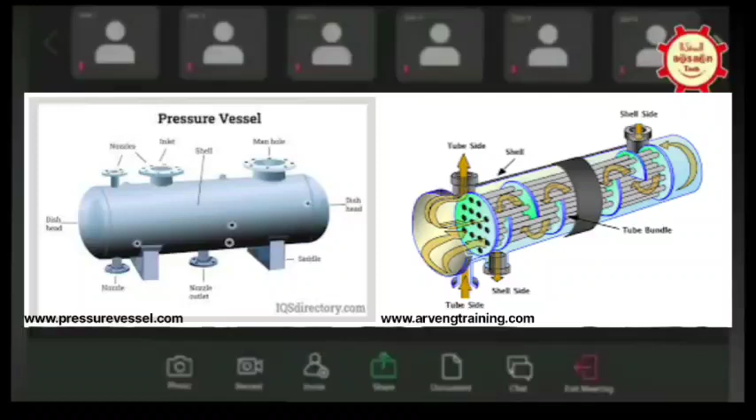Basically, I'm in this field for the last 24 years. From my first job, I started doing designing of pressure vessels and heat exchangers, and now after 24 years, I have experience of designing pressure vessels, heat exchangers, reactors. I started my calculations on the basis of Excel sheets and manual calculation. Now I'm comfortably able to do the job with PV Elite also. So totally you have around 24 years experience, right? Yes.

So you are still working with some company or you started your own? No, right now I just started my own. Okay. Yes, I'm right now working as a consultant. Baroda. Okay, Gujarat. Yes. I think here it's better if you tell your company name so that it gets advertised here also. Yeah. Now I have started just 15 days back.

And I've started my consultancy with one company for ASME U certification. I am guiding them how to achieve the ASME U certificate for their workshop and their facility. I'm training their design engineers as well as quality engineers for the mandatory appendix requirements. So it's my first month rather. And I also started working with one company providing them the designing of equipment.

So you have given your company some name or is it still pending? Right now, sir, I have started with only my name. Okay. Still the name is not finalized yet. No. Okay. Best wishes for your newly started company. Thank you, sir. Thank you.

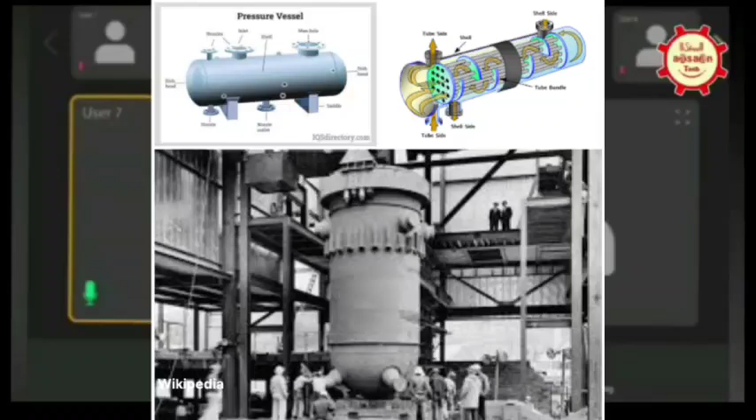Do you have any specific issues that you want to discuss here? Any solutions you want to highlight? No, right now I just wanted to attend this kind of conversation, and would like to know the basic problems with pressure vessel designing, reactor designing or heat exchanger designing. And during discussion, if my help is required, then I could extend it. That's why I have joined this group, sir. Okay. You have 24 years and ASME type jobs, so you have a better hand on the designing of equipment. Best wishes for your new company.

Thank you. Okay. Abhishek Nag, I think last time you missed, right? Yeah, hello, good evening everyone. Good evening. Welcome. So you know Neeraj? No, I don't know Neeraj. I think Abhishek Nag also has around 20 years, right? I have 16 years of experience. 16 years, okay. Myself around 24. And Ramakrishna, you have around 20 years. And Atul Sharma is around 5 years.

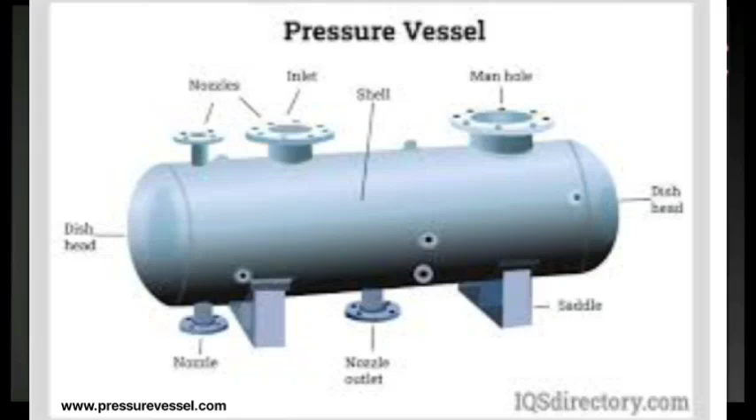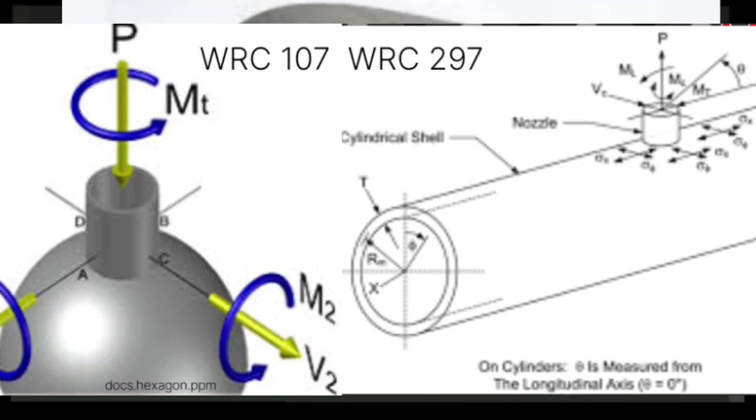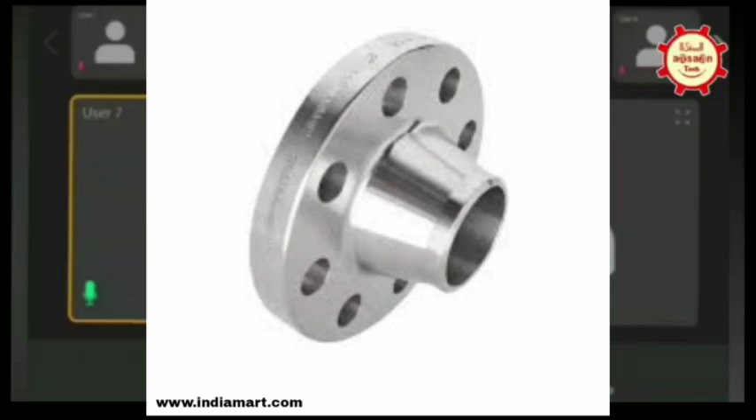Should I start with one of my queries? Okay, we can start. At present, sir, we are studying one concern we are seeing in this pressure vessel, regarding external loading on the nozzle and flanges. My issue is that by default we check external loadings on the nozzle, as per WRC 297. But my question is, why don't we check by default for the flanges also? Because the external load will come on the flanges. If the load is quite high, it will bend the flange face, and with the gas pressure there could be leakage. So why are we not checking it mandatorily for flanges?

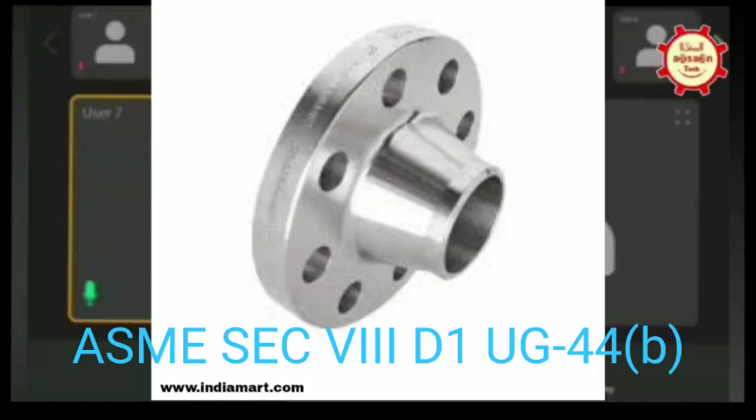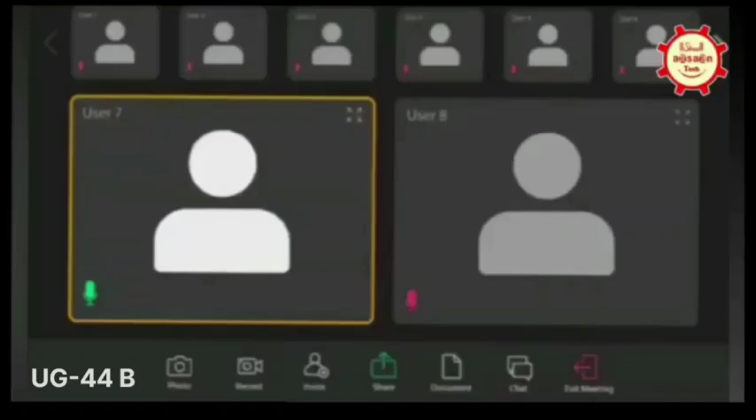In the previous section it is UG-44(b). If you check that box, it generally performs that analysis. The question then is why we don't perform it for the flanges? Anybody want to answer his query? You mean weld neck flanges we are always considering, right? That's already given in the code also, but I think you are referring to SORF flanges, right? No, my question is specifically for weld neck flanges, WNRF flanges. UG-44(b) says external loading may be checked for weld neck flanges. Why not shall be checked?

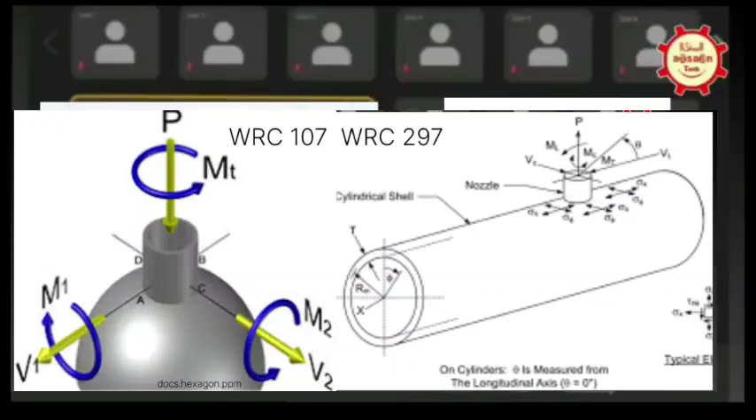Maybe next year they'll make it a mandatory requirement. Actually, Abhishek Nag, you want this flange to be checked compulsorily, right? Yeah, the basic thing, in layman language: if the external piping load is coming on the nozzle, we are checking for that. Why don't we check for the flange? Shall I answer your query, Abhishek? Yeah, please go ahead. So by default, everybody is checking.

I mean, in all our projects we are doing that, and most of the engineers are doing it. So there is no question about that. So it is a good practice. So I think your concern is about the code wording that they mentioned, maybe, right? Yeah, correct. So why didn't they put it as "shall be", right? Yes.

So normally, as far as my point of view is, ASME, whenever it puts some new clause or some new design method, I think they will give some time before making it mandatory. That's why they put it like this, and then maybe after some people give feedback, they will make it mandatory. I think that's the reason. That's what I feel. So if your query is answered, then I have a question to Neeraj.

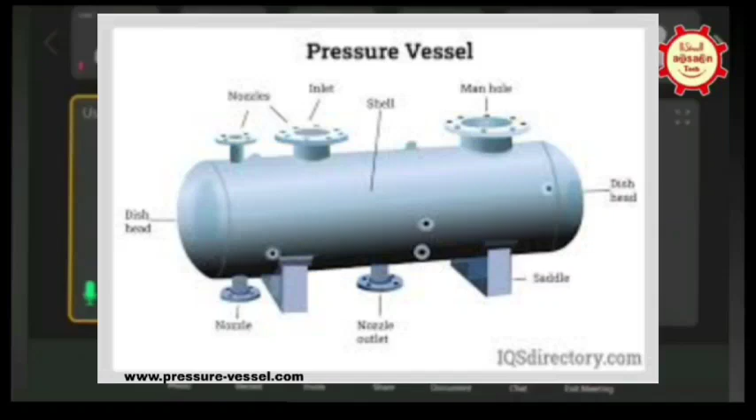I want to add something in this one. Like Abhishek told, now almost all these flanges started compulsory verification for U stamp. For normal vessels which are not U stamped, they are saying maybe if you have not done it, it's okay. But for U stamp, meaning ASME certified vessels, they want this flange compulsorily verified as per the recent code update.

No, actually, reputed EPCs, I mean PMCs, like U stamp. So for all our projects, none of the equipment is U stamped, but we are mandatorily checking it. So as far as my point of view, in all oil and gas projects generally, in most of the cases, it will be checked. Yeah, all EPCs have also made it compulsory to be verified. Correct.

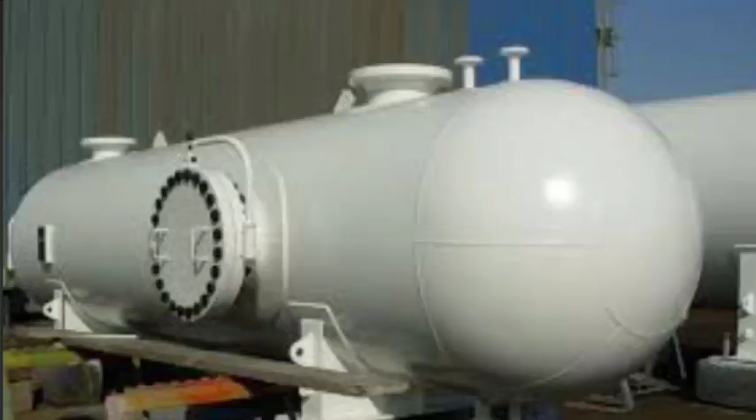Sir, what is happening is I am arguing with the client that you are saying external loads are to be checked for the flanges. But my argument is it is not a U stamp vessel. Nowhere in the specification is it mentioned that we have to follow UG-44. So why should we perform UG-44? Because when we perform UG-44, our flange rating goes from 150 up to 300.

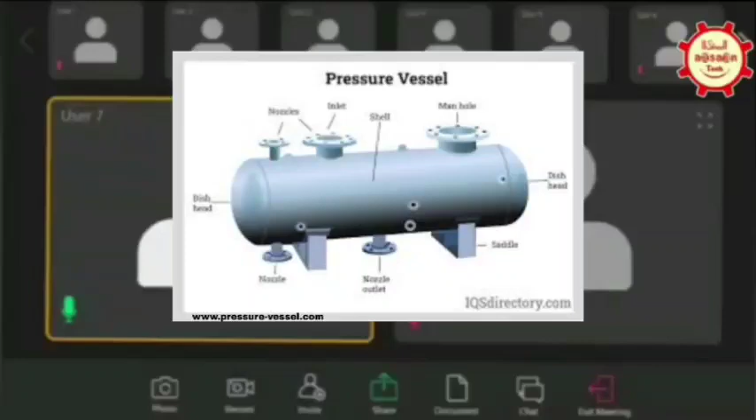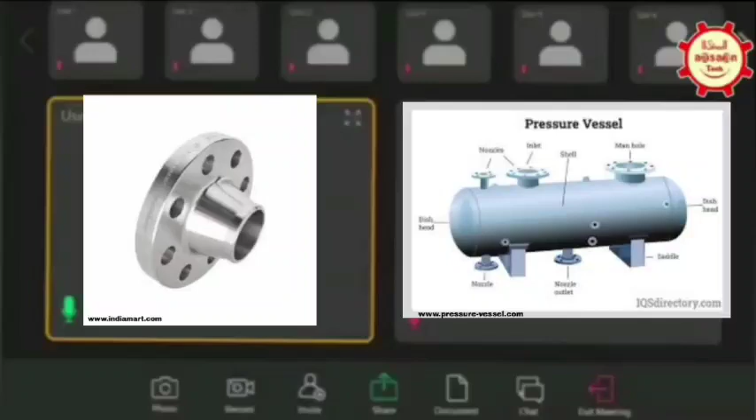It adds cost. Yeah, the flange rating increases, but in the long-term running of your vessel it will be safer. If you verify with that and provide higher rating flanges, your vessel will be safer from failing in between working. So that's why they want these loads to be verified.

Yeah. So I have a question to Neeraj, in continuation. I think Abhishek is clear now. You were mentioning that in how the nozzle loads will be analyzed there is a difference between WNRF type and slip-on. Is that what you were saying? Can you just throw some light on that?

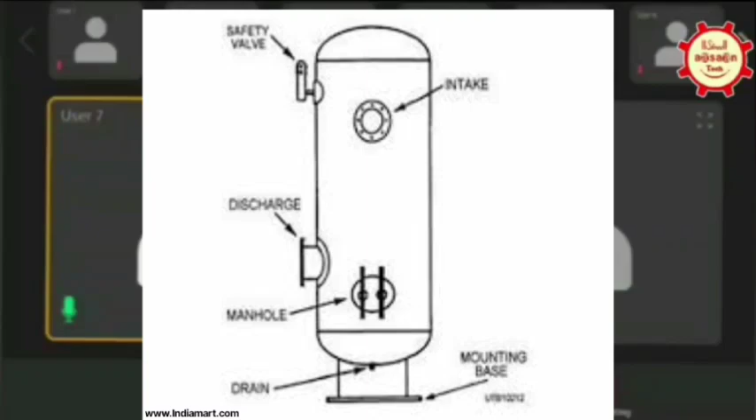Yes. In my earlier career, I designed a lot of pharmaceutical equipment also. I would like to go back to Abhishek's question, and I'll connect with this one. In one of our ASME audits, our company made an air receiver. It was the first job, a demo vessel, and in the air receiver they had not provided any external nozzle loading. The team leader who came for the final audit told us, if this external loading is not specified and you don't go for this derating, then it's not mandatory.

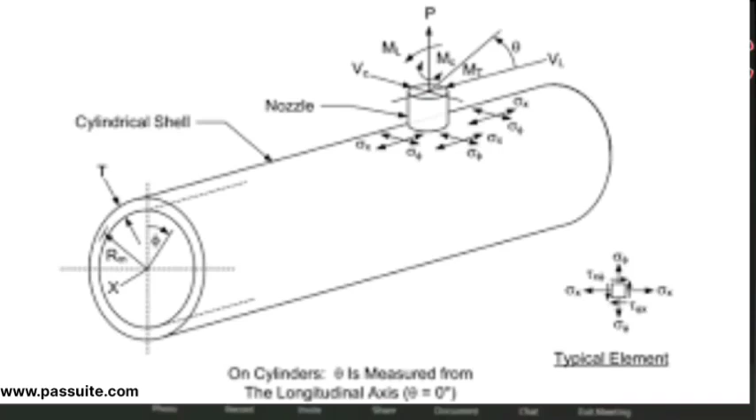But in future, if you have a job, how will you be able to justify your design at that point of time? That is what he would like to check. So it is not mandatory, but you have to specify it so that your design engineer is capable of handling those external loads on the nozzle. So they asked us to specify the nozzle load as per API 661 and add those loads on the nozzle, and we got it done with our design engineer, even though it's not specified in the code.

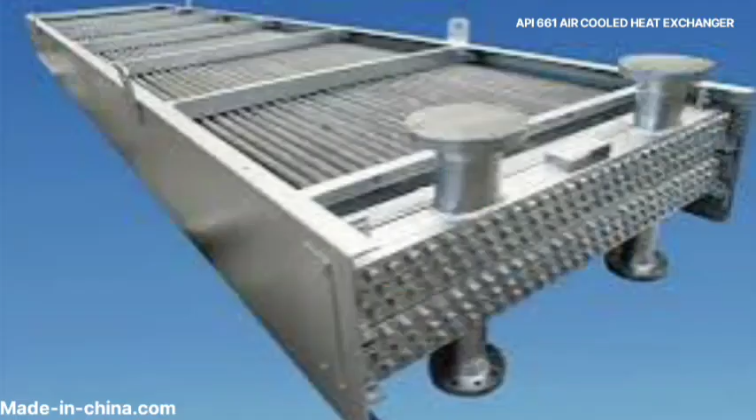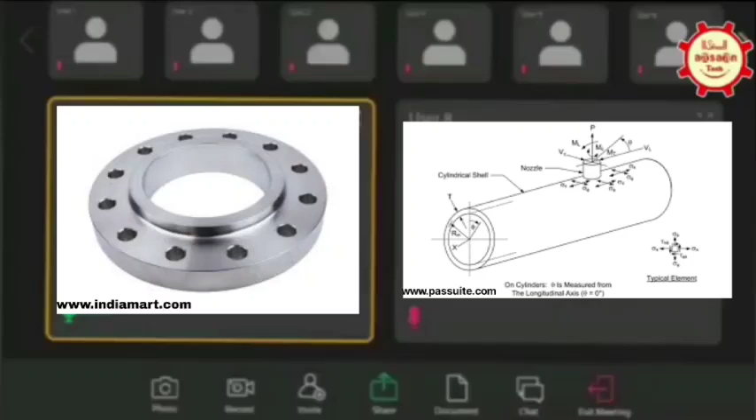So API 661 means it is a plate heat exchanger, right? No, API 661 is air cooled heat exchanger. Sorry, yes, 662 is plate heat exchanger. Okay. And for these SORF flanges, all nozzle loadings are always there. Wherever instrument nozzles are there, no nozzle loading should be considered. But wherever it is connected to a pump or any process nozzle, nozzle loading will always be there.

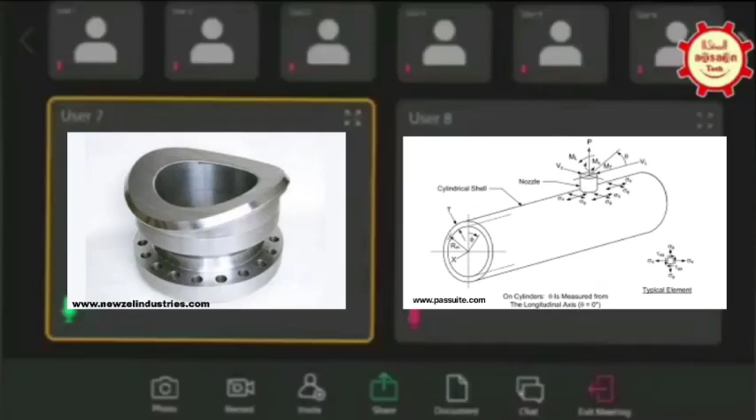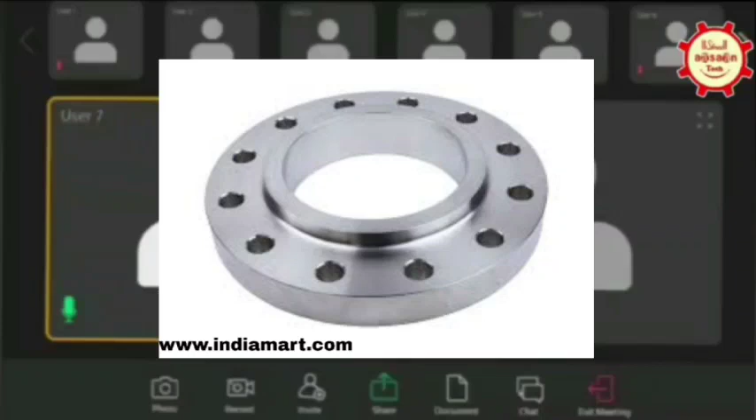So if pressure is less and SORF flanges will be connected, then code is allowing that you need not consider the derating of the flanges. So that's why, where it is specifically mentioned, there is a distinction between WNRF and SORF. It is very clearly written in UG-44(b) that only WNRF flanges, and not SORF flanges or any other kind of flanges, are applicable for derating. Yes. Okay. So code is written for WNRF.

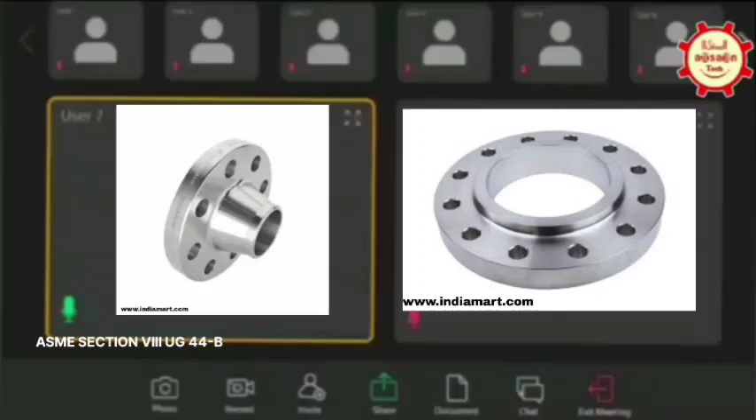Right. So my question is, what about the SORF flanges? Although code is saying it is not required, what is your general opinion? There also it must cause some kind of leakage, no? Correct. But what I understand from my experience is, if you see, the weld neck flange welded with the nozzle pipe has a butt weld joint, right? But when you are welding it with SORF, slip-on flanges, it's not a butt weld. It's a kind of type 7 joint, both side fillets.

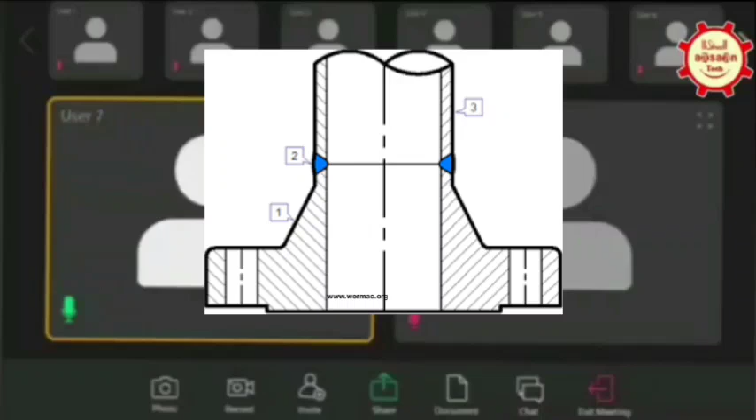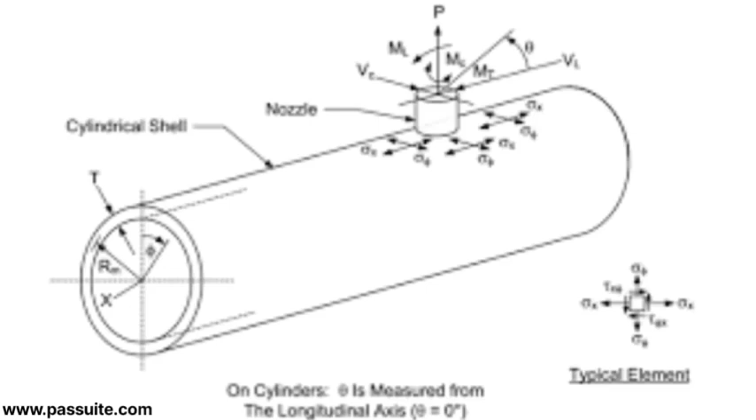Right, correct. So it's my assumption that it doesn't have any worry about bending from one point, because it has been welded from two sides. So that's why nozzle loading is not quite conservative to be considered in that case. That is only my thinking. I have never cross-checked with anyone. But butt weld, there is no support. If the weld fails, then bending loading and all other loadings will take place immediately and start leaking out.

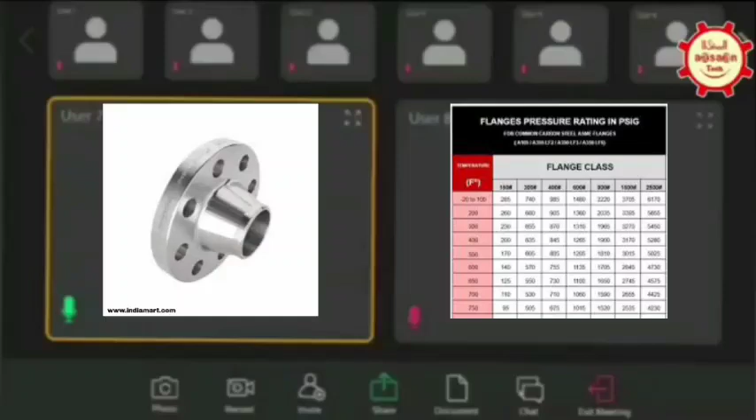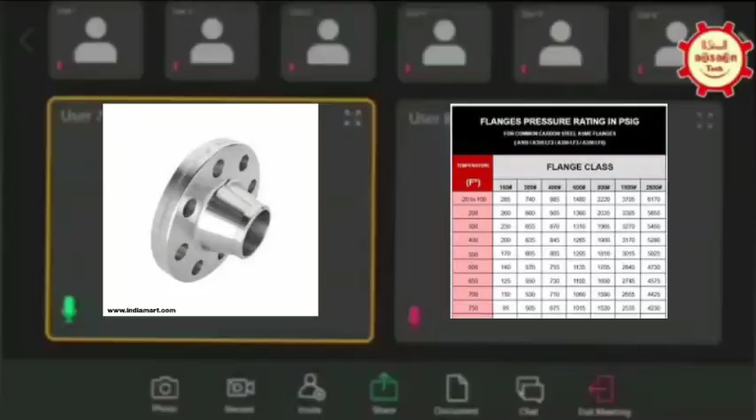No, but if you think about it in terms of strength, a WNRF flange is much stronger compared to slip-on. Correct. For pressure rating. You're saying there are two welds, so the slip-on flange will take more load and all kind of thing. I think that I disagree. But maybe, I don't know. It could be that the connection is flexible, I also don't know. Correct. It is nowhere written. I have raised so many posts for this on LinkedIn and other places, but I could not get any satisfactory answer.

And thing is, strength is okay, but when bending load comes, your lap kind of joint will withstand more than the butt weld. That is what I can feel. And this one is a kind of lap weld joint at that particular point. So maybe the bending stresses or bending moment can be much more easily absorbed. Yes. That is the only reason. But I have to check with some experts. I have tried so many times, but couldn't get through.

Yeah. So to add to that, another thing is generally slip-on flanges will be used only in non-critical service. Maybe the loads are not too high, so maybe that is also the reason. Correct. Okay. Thank you. Normally slip-on is used where it's not that major service. And weld neck is for severe service, or maybe U stamp vessels, or high pressure. So basically weld neck flanges have to be used in that.

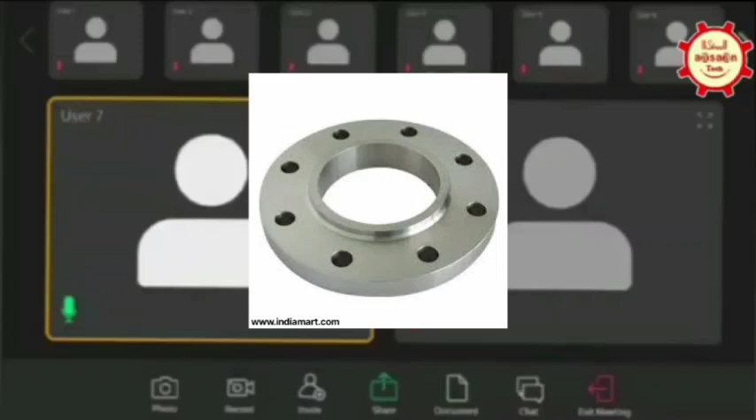But Abhishek's question is on flanges, the loads on the flanges. Correct. So you are saying that slip-on flanges will take more loads than the weld neck? It's not load, I am talking about the bending. Okay, so slip-on takes more bending than weld neck. Yes. Okay. You also try to cross-check this question. Why? Because normally in high pressure, high loads, we go for weld neck. And for normal service, there is not much load, not much pressure, then we'll go for slip-on.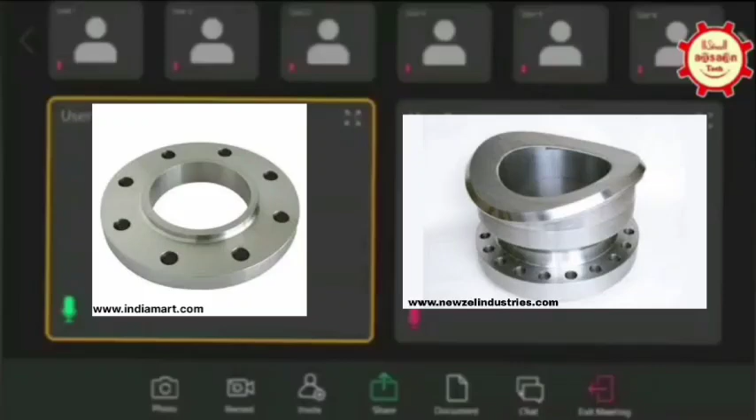Because assume that nozzle is connected with the pump and the pump has some vibration, then definitely the bending load will immediately transfer to that particular welding joint. So maybe that bending load will be critical for taking care of that joint. Okay, Atul or Anshul, do you have any opinion on this one?

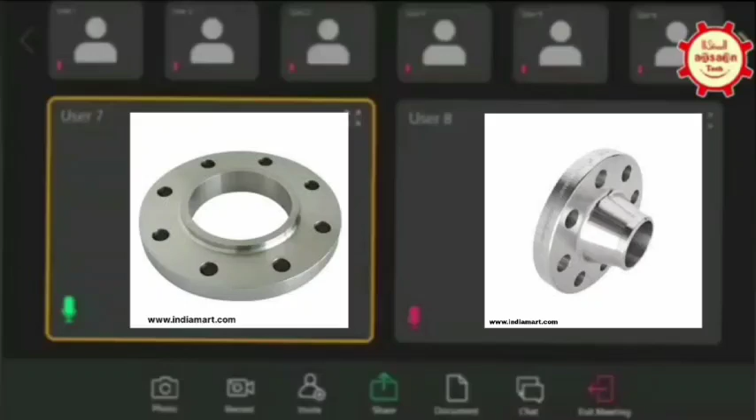Yes, actually, slip-on flanges have more moment of inertia than weld neck. Moment of inertia means it takes more load. Their mass is distributed more away from the center as compared to the weld neck. Okay, so it will take more moment. Moment of inertia is directly connected with the center, means the CG. If you see, the CG of a weld neck flange will be very close. Now I got some idea from Anshul. There are two weld joints, so the CG will definitely shift and moment of inertia will be more. I think this is also a good logic, Anshul.

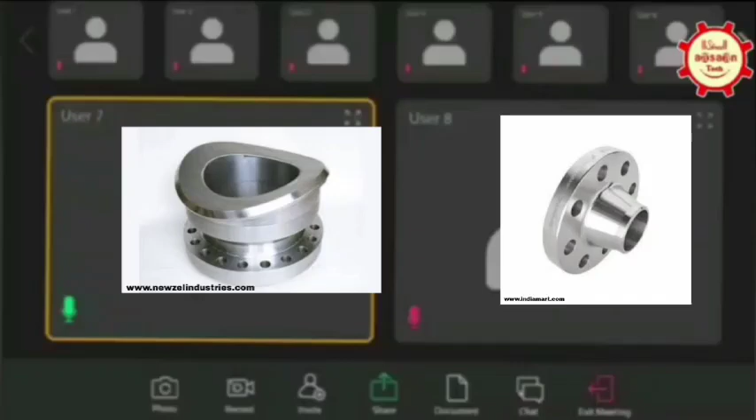Abhishek, for your flange rating question, they have mentioned in the MR that you have to check the nozzle, and if the flange is derating, you have to re-rate the flange. First check the flange as per Appendix 2. If it passes, you don't need to derate the flange. If it does not pass, only then do you use the higher rating flange. They have written it specifically.

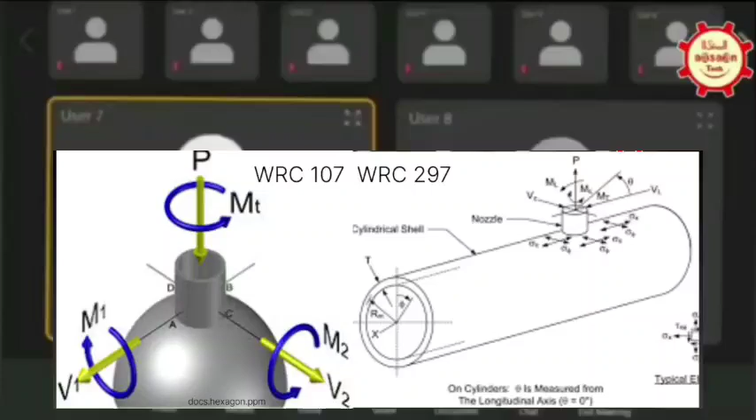This is in the specification, not in the ASME code, so we cannot argue with the client about that. Actually, many people use the Appendix 2 design to prove that nozzle load is not a consideration, because you have designed considering the worst case. Appendix 2 is more severe than the ASME B16.5 application.

16.5 gives the direct rating sizes. The 16.5 is based on past data rather than more theoretical calculation. So it means it's based on requirement, as you said. It may not be the case for Abhishek's client - their client requirement may be different. I was saying that even they are tired of raising the rating, that's why they have mentioned it.

Okay Abhishek, I think you got your answer. If you verify, it will be well and good. If you don't verify, maybe in future you may face some issues. That's why they are asking for the actual load, which is for the piping.

If you do the actual piping loads, you can put those loads in the field and see what the flange rating is, whether it passed that load or not. But here they're saying do iteration - just tell me with this thing how much maximum load the flange can take.

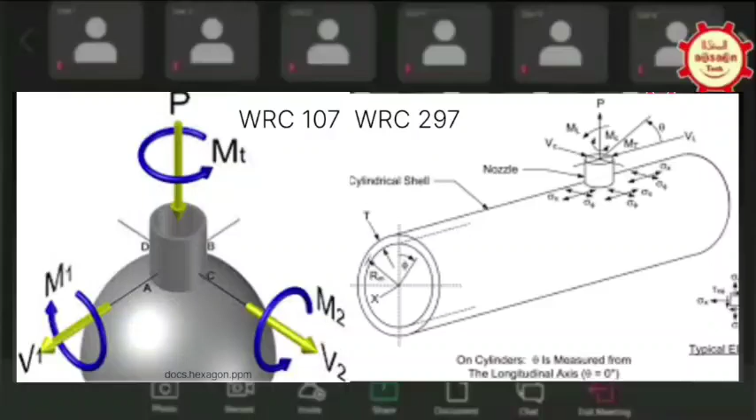They are in fact asking us to give them our load so that they will check with their piping. Whatever you put in the PV Elite at those loads, that's verifying at the edge of the pipe, meaning the nozzle end which is connected to the shell - so at that place it is verifying.

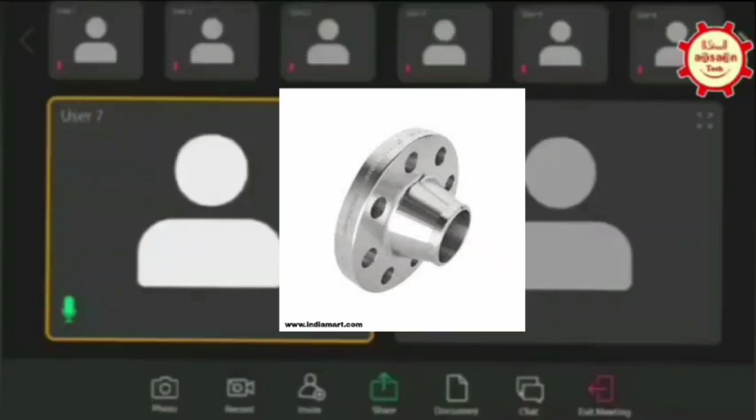But this derating is verifying at the flange face. So your flange is verified in the derating one, and your edge is verified in PV Elite when you put the loads, the WRC one. So these two are different, right?

Yes, but even if you are applying UG-44, it takes the flange into account - not the face, the flange. Either way, the flange is taking that load.

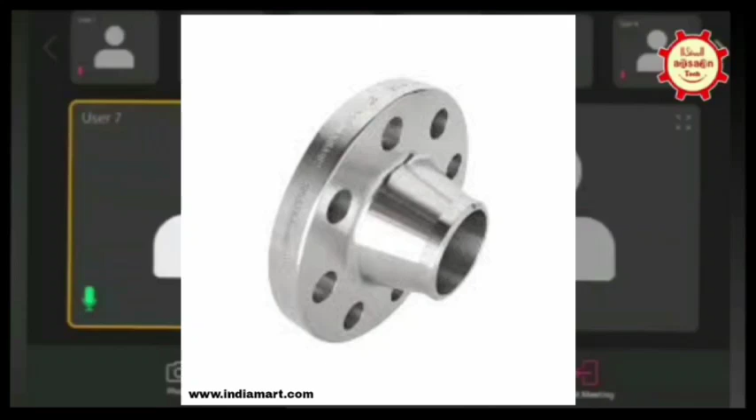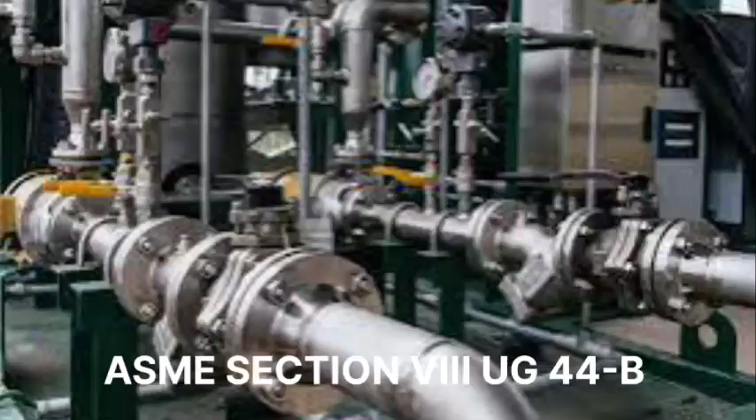You just tell me the figure, how much load a 150 class rating can take - we'll check with our piping. Yes, you have to verify with this one, UG-44, and I'm asking that you give me the piping load in our calculation.

Yes, that is the better option. You can't just rerun the analysis by entering the values - it's iteration then.

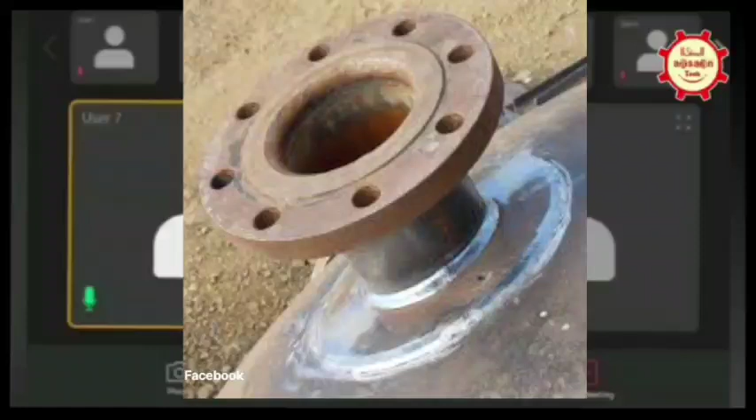But normally these loads come from piping, and our static analysis will not give us that this much it can take. Reverse engineering - whatever supports they provide for their piping, after the end of where our piping is ending, which connects to our nozzle, at that place they will provide the loads.

This is where the loads arrive from piping, and they will give us, and we have to verify our nozzle. But rather than that, if you provide from your side that these are the loads we can take, then they have to change their routing or provide additional support. But generally we have standard loads - some specifications refer to the maximum loads piping can give you, so you can take that, or else you can ask your piping how much loads you are getting and add that.

Okay thank you. Coming to Neeraj - I checked UG-44 but didn't find that statement that it is applicable only for slip-on flanges. No, it's applicable only for weld neck flanges.

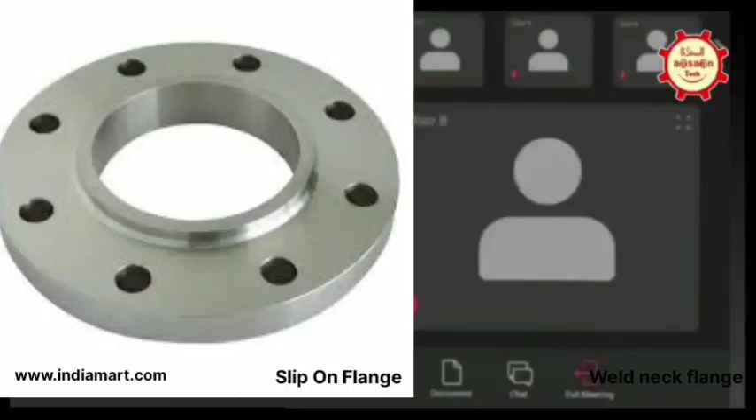Ramakrishna, can you share that? You refer to UG-44B. Yes, they have UG-44B, written evaluation for flange joint with weld neck flanges.

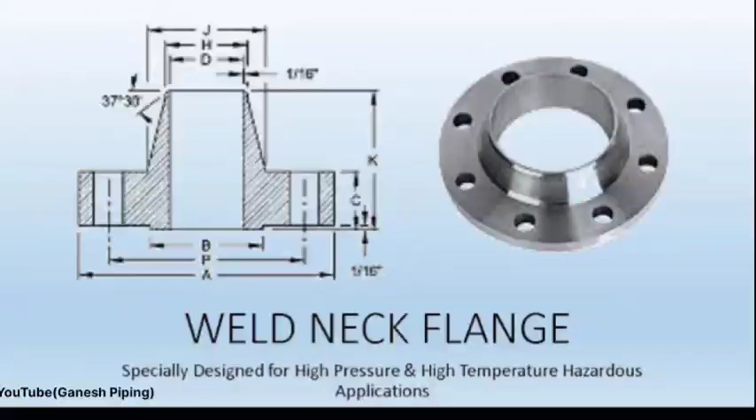Where they mentioned, can you share the screen? Okay, right, you got it. I got it. Yes, I missed it.

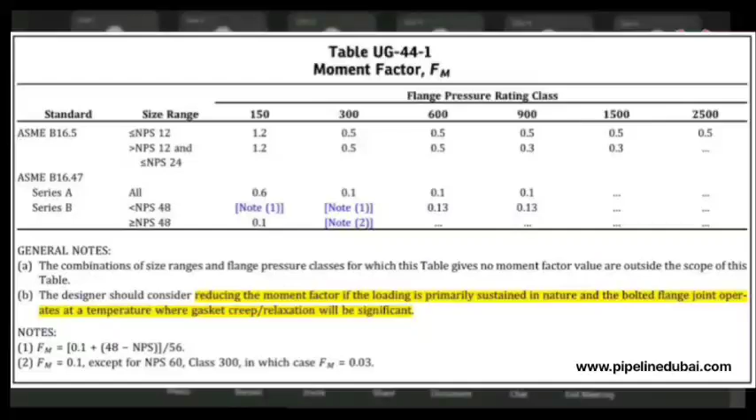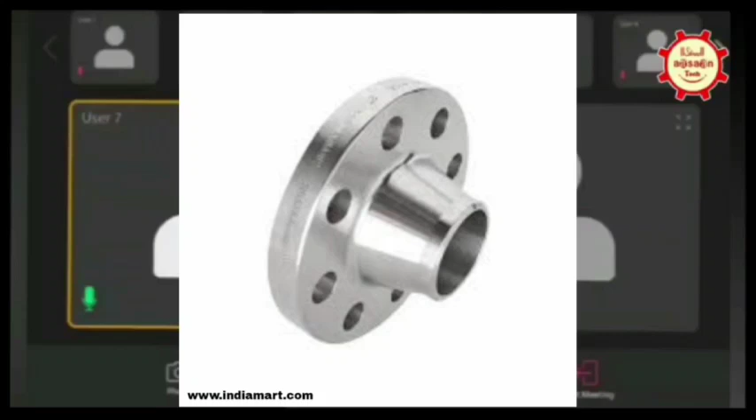Thank you. Now the code has revised this 2901-1 code case, because they have changed the FM value given in table 44. That FM value was a major culprit, so they have revised the entire FM value. Now if you have the 2901-1 code case, it shows that a lot of flanges were failing before, but now all the flanges could very easily pass due to that revision in the table.

Do you have that code case? Actually, I wasn't able to find that. No, it's not available, I checked on the ASME website. But I got code case 2901. Yeah, 2901-1. 2901 was the original code case from 2019.

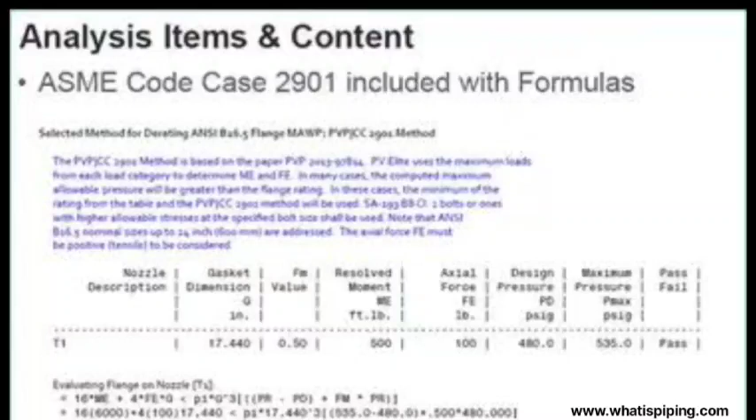They have revised it again in 2024, just one month back, that is 2901-1. I think Atul Sharma, you were supposed to share this, no? I only have 2901, not -1. You don't have it, okay. Yeah, 2901 I have also in the group, but -1 I don't have.

Once I get it, I will upload it in the group, don't worry. Yeah, please, because I got that table in an Excel sheet. I don't know how much we can trust it, but I have that revised table already. If you want, I can upload it. It's not authentic right now because I don't have the code case, but I can upload it.

Anyway, please upload it, it might help Abhishek right now. Okay, Ramakrishna, do you want to share some more? Yeah, one minute, I will share it. So my screen is visible, I guess. Yeah, it's coming through.

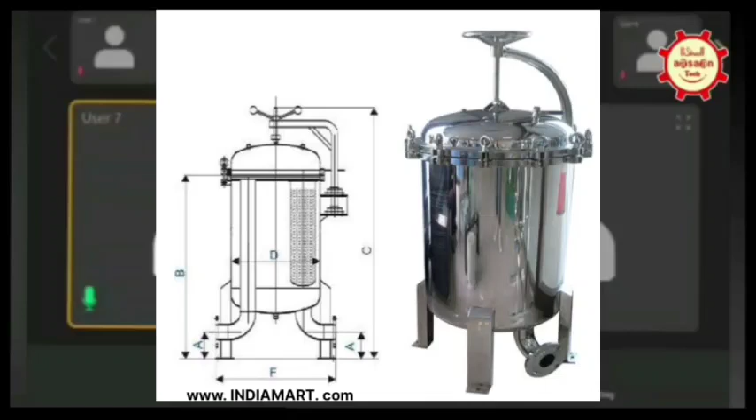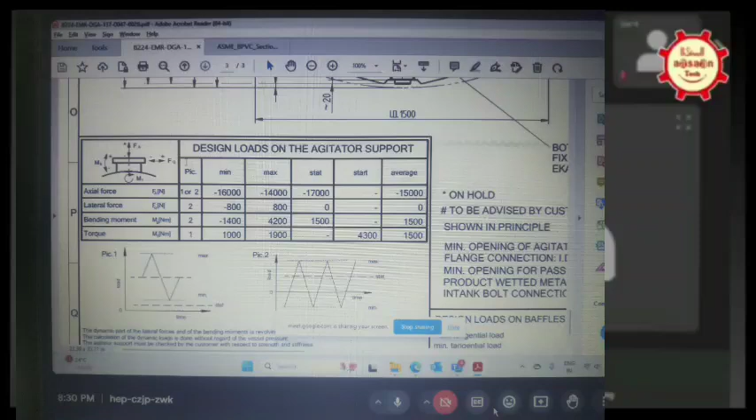Can anybody provide guidance? Can you please repeat your query? So normally for agitator vendors, they will provide the equivalent static load because this needs to be analyzed. This load we need to put on the nozzle, to analyze it or to provide proper support we need to analyze it. Normally vendors give equivalent static load, but actually it is dynamic, right?

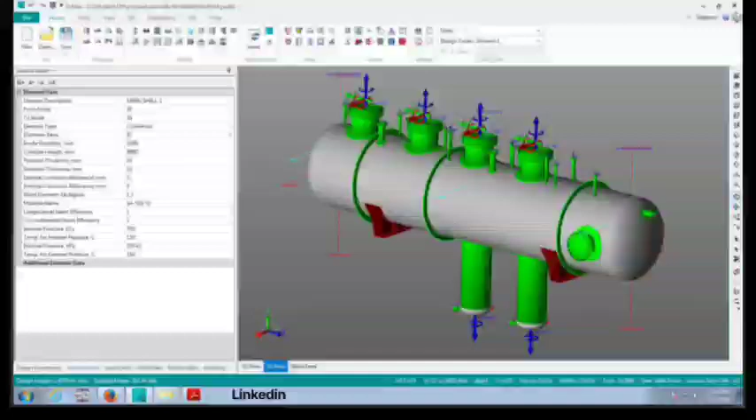It is dynamic because it's continuously rotating, so it will be dynamic loading, but vendors provide equivalent static load using some conversion factor, and that we can put into our PV Elite and analyze. But in this case, the vendor has provided only dynamic load, he didn't give the static load. So can anybody guide how we can convert this to equivalent static load?

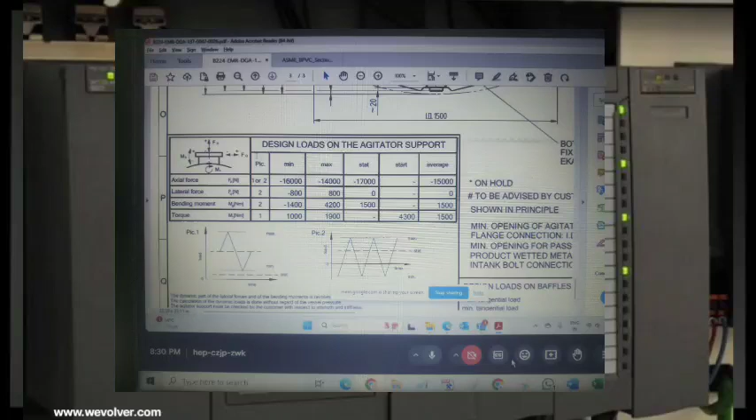But where is it given that it is dynamic? Because you see this, you see PIC1, PIC2, with respect to time he has given that chart, you see below. It is clear, no? Yes, it is clear. But we cannot do the dynamic analysis unless we do the FEA.

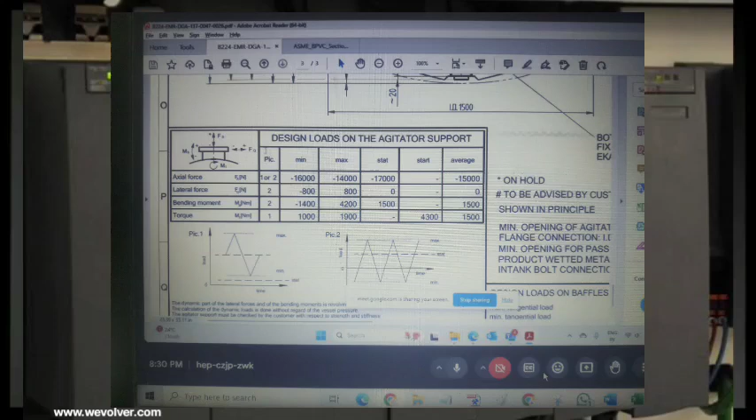So you are thinking that this is the dynamic load? Yeah, right, yes, you see that he has given, if you see PIC 1 and PIC 2, and he has written also, where the loads are given, for example for axial force, he said 1 or 2, meaning he has given how much is minimum and what is maximum. Some 'stat' actually he has written, but I don't know what is stat and what is start.

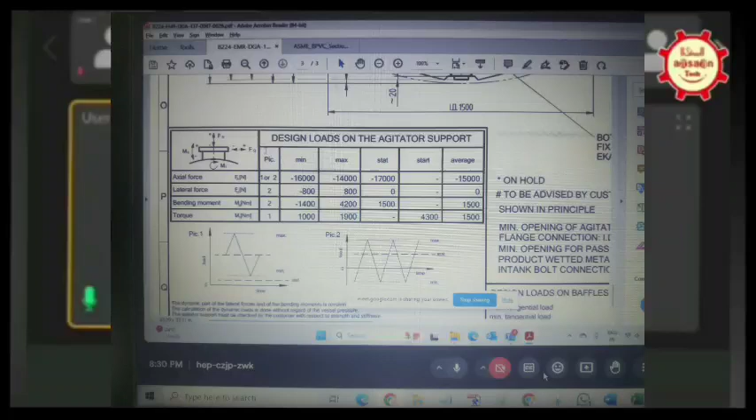I don't know, I think he didn't mention clearly what is stat, whether it's static load, it's not clear, he didn't put it clearly. Anybody want to answer? Static is greater than max. I don't know, but you're saying this is the dynamic loads. Yeah, sure, definitely it is a dynamic load, but even minimum maximum is given, and below that he is giving that curve also.

You see, with respect to time he has given this. Yeah, but this with respect to time given, maybe it's for the motor connected to this vessel. No, you see this design loads on agitator support, this is load only, external load. Yeah, so this is on the support. Support in the sense support is our nozzle basically. Yeah, but then these values directly, it's not dynamic, it's just axial and whatever lateral bending is given. But I see it as dynamic only, because he has given minimum, maximum, and he is giving that curve also, you see he has given a chart.

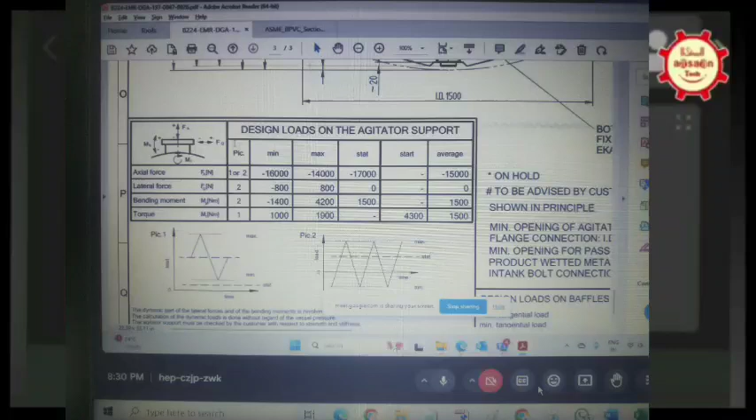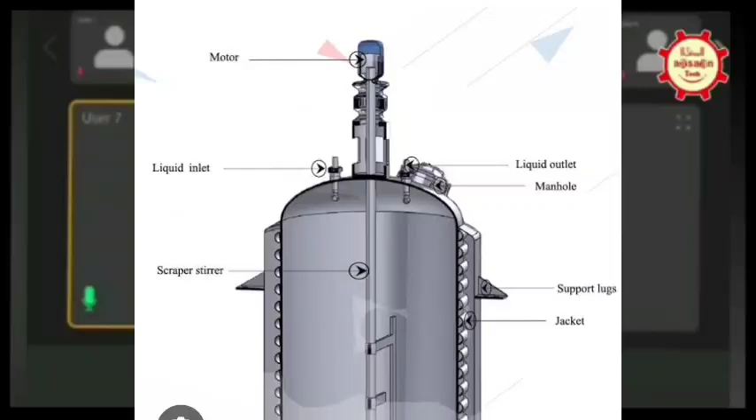Yeah, the chart is given, but it's not applicable to our nozzle. I think this is applicable to his motor, which he is placing on our nozzle. No, if you see this picture, support basically means the nozzle only, because your agitator will be supported on our nozzle only.

For this type of job, where directly the maximum value is given, we added that one. So other vendors will write equivalent static load like that. They will clearly write this much load and this much moment, they will give it. But this particular vendor has given something like this.

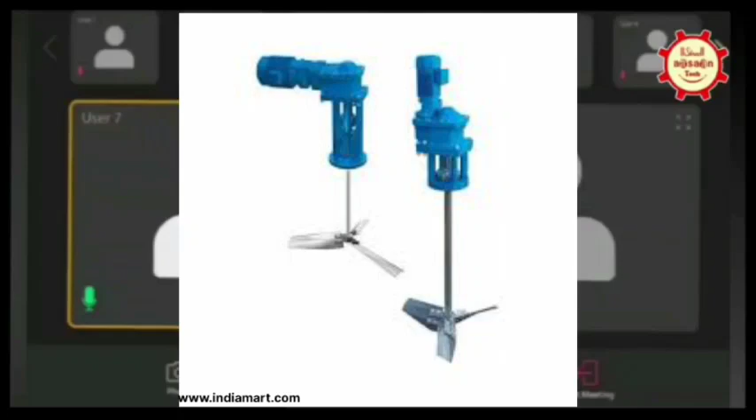He's also added so many notes, something about the dynamic part of the lateral force and bending moments being revolving. Calculation of dynamic load is done without regard to the vessel pressure. And he has added so many notes. So are these notes applicable to our nozzle, or is it applicable to his motor?

No, it is not for the motor, because it is clearly for the support only. Support means it is our nozzle.

Okay, I think Mr. Neeraj is saying something. Neeraj, you want to add something? Yes, Ramakrishna, this one is basically for the nozzle only, where the actual agitator, your lantern, and entire shaft will sit on top of it, right? Exactly.

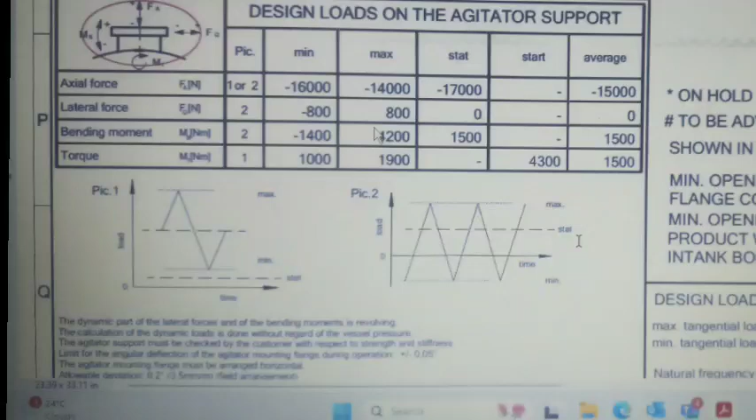But if you see note number 2, calculation of the dynamic loads is done without regard of the vessel pressure. So the load which has been given over here, you have to put its F value and M value in the PV Elite with maximum and average.

First you check with the maximum, then this nozzle will sustain. Then I don't think you will have to worry about anything, because if something has to be calculated in the graph, then they will have to provide the basic value also in the graph. But they have given direct readings over here.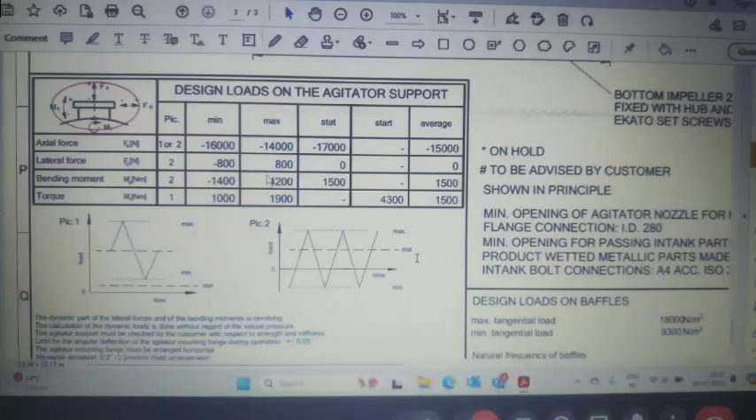So you have to take this maximum, FA or FQ value, and then your moment. So these 4 things you put into the occasional load in a PV Elite, WRC column, and try to check.

Actually, occasional load is for once in a while, but here it is continuously changing because it is a continuous rotation. Then you have to go with the sustained load. Yeah, exactly, so that's what.

So actually, normally I think some multiplication factor will be there. If it is dynamic, they'll take maybe 2 times or something like that. That I am not sure, if somebody can add it. Anyway, I will go back to the vendor and clarify with them. So if somebody finds an answer later, you can just put it in the group.

Yeah, as Neeraj said, we have to take the maximum one. So we also went with the maximum one. Also, you can check with the vendor.

No, but here the catch is, suppose if it is a cyclic load, okay, with a maximum and minimum, I will design only with the maximum and that is enough - no, it is not like that, because a fatigue analysis has to be done. So in that case, it is different, right? That's why I think some kind of dynamic analysis has to be done, if we have to go with this. That's what I feel.

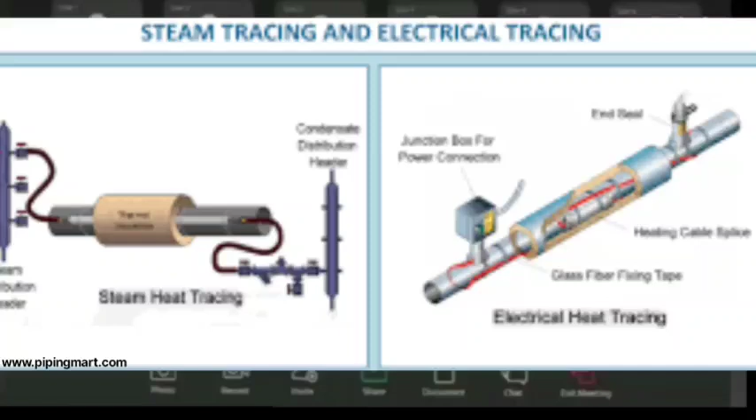Anybody having any experience with this electrical tracing? How will it be supported? What kind of supports are required, or whether supports are required at all or not? So electrical tracing or heat tracing? It is electrical tracing, not heat tracing. So it's copper wire. Yes. It is to be wound on the vessel or piping. Yeah, it is a vessel. To heat that particular pipe. Yes. To maintain the temperature of the process.

So should we need to provide any supports at this point of time, or can they manage at site? They can manage at site. We are always doing this kind of job at site, and special contractors are available. You do not require to, but you have to provide the length of wires, how much heat is required, and the size of the cable. So that anyway will be taken care of by the electrical department. So I need not worry about it. Only thing is electrical tracing is required.

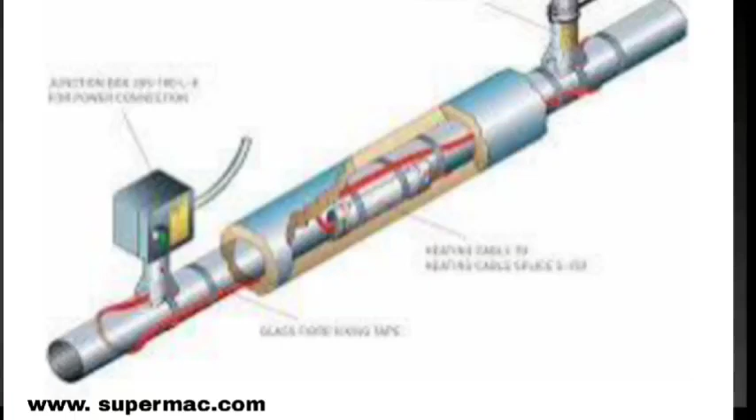And I have one more question. This particular vessel has electrical tracing and it has insulation. So first they will complete the electrical tracing, and then over that they will do the insulation. Correct, exactly. Because if this process piping is in the Europe region, then they have to maintain the temperature and at the same time provide the insulation outside the pipe. So first will come the heat tracing or electrical tracing, and then the insulation.

Now, in our case, some minimum temperature has to be maintained. The material is liquid plastic, so some temperature has to be maintained so that it will stay in the molten state. Correct. So it is for our Indian job only. So it means that plastic will immediately solidify even in Indian temperature? It is not exactly a plastic, it is a powder; it's actually a polypropylene plant. It's not the full product, so it is in between.

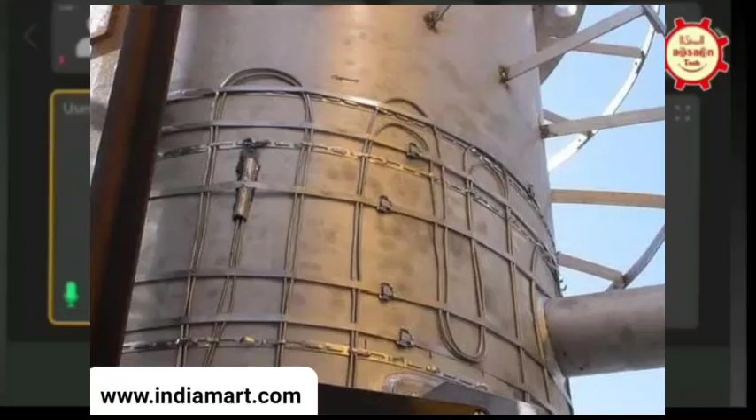So this heat tracing, as per Neeraj, is wound on the vessel to heat that vessel, and this insulation is to avoid any direct touch or any heat loss, right, Neeraj? Correct. And to hold that wire, one silver tape is also required. Yes, it will be provided by the supplier, contractor. So we do not provide any welding or anything? Nothing. They will take care at the site. Okay. Because our PMC is asking to please provide the details, what kind of support will be provided. So that is his question.

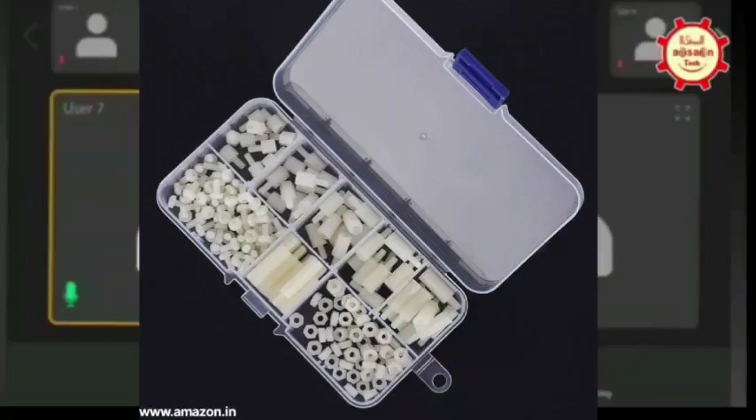But Neeraj, for this heat tracing, similar to insulation support, will we provide anything like that? No, insulation support itself is a mechanical item where the mechanical engineer comes into the picture. They have to provide insulation bolt, insulation nut, insulation plate, insulation clamp kind of things. But for heat tracing you just have to keep it in 100% touch with the particular pipe or equipment, by some kind of silver tape. I forgot the name of that tape. That is to be provided by the contractor. Okay, with the tape only it will stick to the vessel. So no welding business. Yes. Thank you, I am relieved.